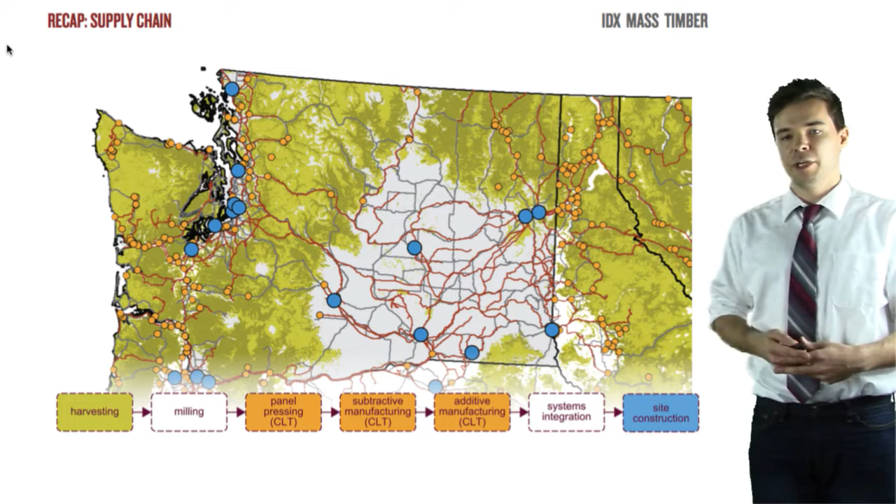We sifted through it and narrowed our focus on something more manageable. Here's an example of that: some more recent research and analysis that we did on four specific supply chains.

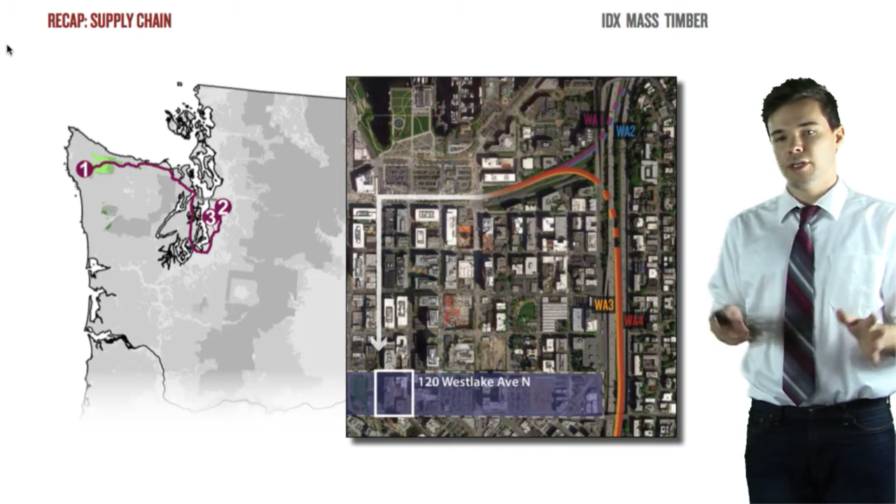On your left, you'll see one of the routes we chose. I believe it's from Forks, Washington, and that led to the number 3 on the map there, which is this zoomed in aerial photo of the South Lake Union area where we decided to have all these routes meet. Now this is what we're studying currently as the South Lake Union area, but the important thing to note is that because we were able to focus on just these few specific instances, we were able to get a lot more out of our research.

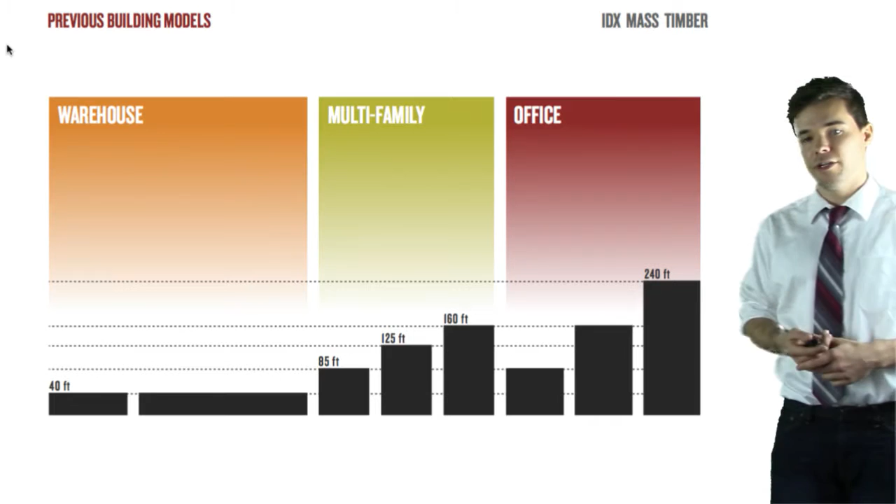And the same thing can be said for our building models. So these are pretty much all the models that we've examined so far in our research. We have some warehouses on the end there, multifamily in various sizes, and office in various heights. This is what we have now.

We narrowed it down and got rid of the warehouses and the 240-foot office for a number of reasons. One reason is that we can focus on just our residential and commercial buildings, and because these heights are very similar and the buildings are very similar, we can help each other's research while still having individual learning and creativity with our own model.

One other important thing to note is that all of these building models fall into what is sometimes called a mid-rise gap. The issue with this region right now is that traditional light frame timber can only be constructed so high before it becomes unsafe, up to about 85 feet, and then concrete and steel, which is far more expensive, is only really economically sound if you're building very tall towers, above 160 feet or even 240 feet. So this region here is something developers aren't really interested in until now, because we have mass timber. We can get these buildings up quick and for cheap, and that's a really big opportunity for us to look into.

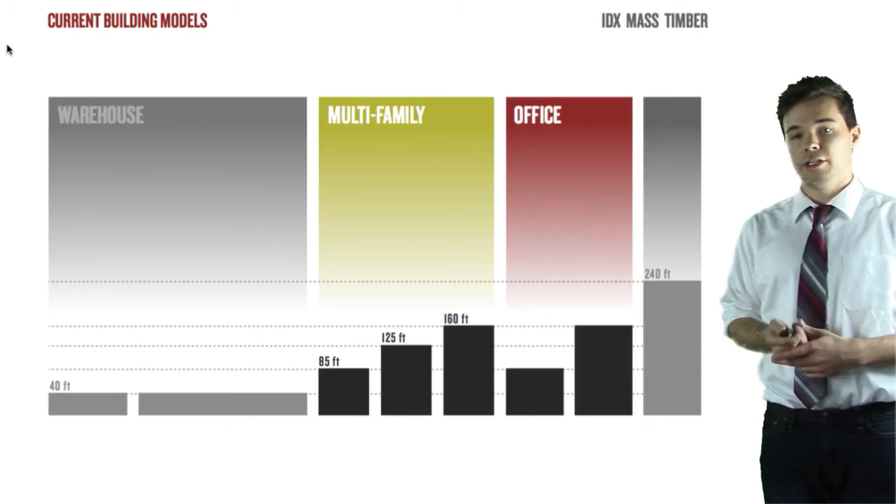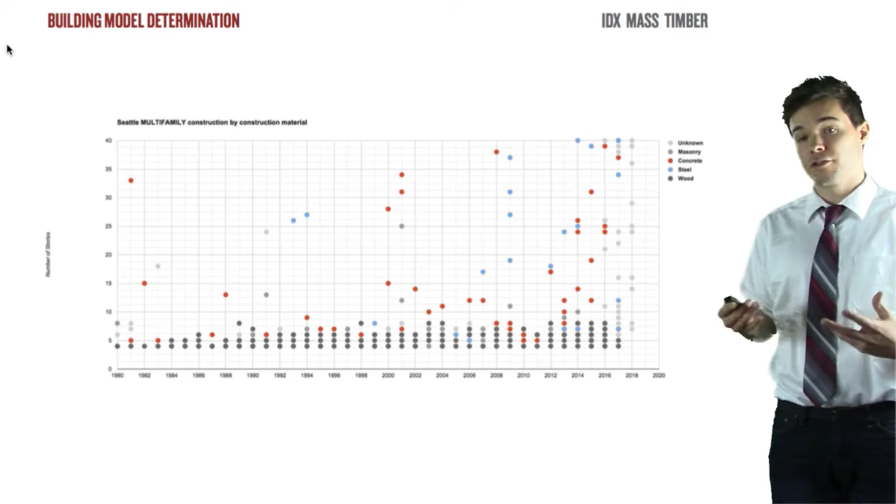By the way, this is the multifamily residential graph, and we also have an office graph, which is very similar, so it's a good example of that.

As for our locations, we started off with what we called the 4-state region: Washington, Montana, Idaho, and Oregon. Last year we narrowed it down to the Puget Sound area, since we had a lot of our current models in that area, as well as the warehouses falling into that category. We narrowed that down even further. Earlier this year, we looked at some very specific possibilities in Redmond and Bellevue, but we decided to stick with Seattle because we were more familiar with the code.

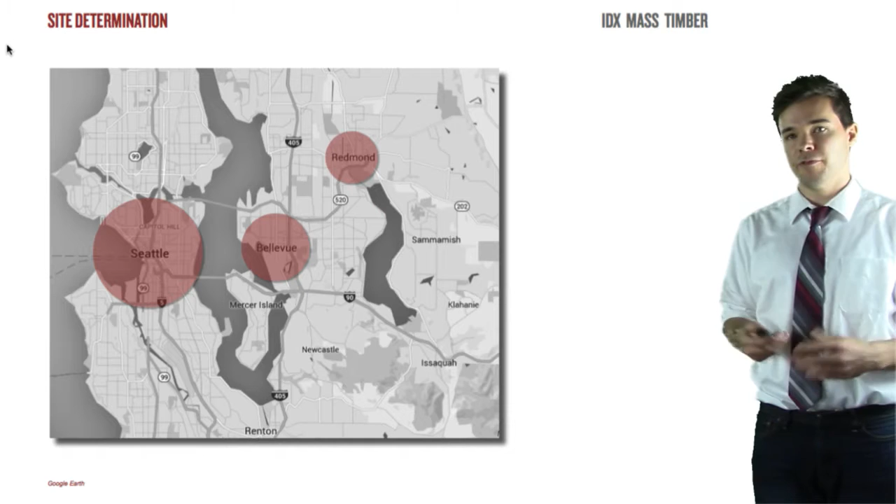Although it's important to note that the code is very similar to Redmond and Bellevue, and a lot of our models can be very easily adjusted to fit those codes as well, so that's a great benefit for our models. So we're going to be focusing on the South Lake Union region specifically, and this is an urban center much like Northgate or the University District or Capitol Hill, and these areas are booming, a lot of population growth and a lot of buildings going up as quick as possible. So these are very good places for us to be designing for.

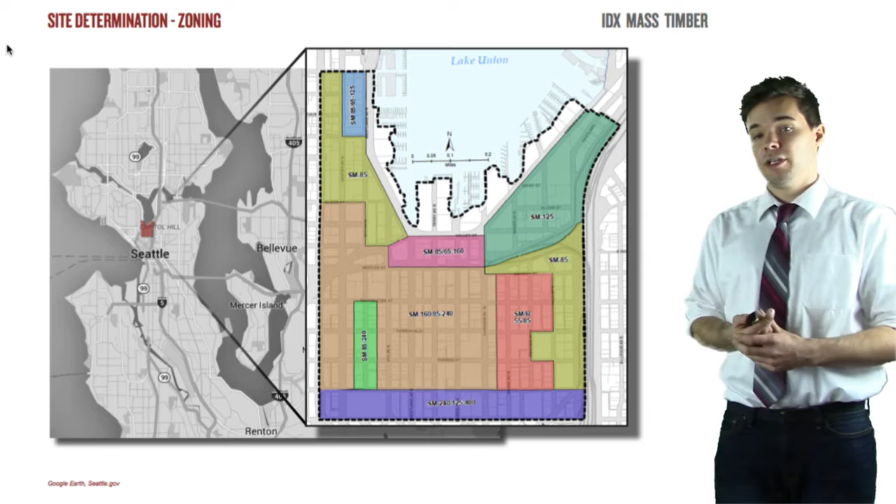And specifically these SM zones that you're seeing on this map are called Seattle Mixed Use. And in those regions we can actually build office or commercial and residential on the same lot. So that's extremely beneficial to us in that we can maybe even use multiple models of ours. And then here is a kind of zoomed in view of the same zones and where each of our building designs fall into those zones. So you can see that we clearly have a lot of options here, which is very exciting.

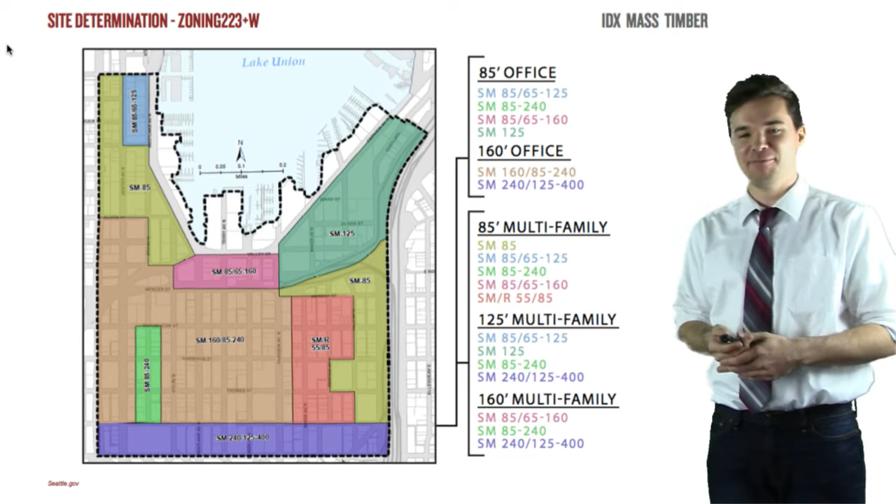However, building height and zoning are just two of many factors that we need to consider. So I'm going to go ahead and let Errol jump in here and explain some of our building assumptions, and he's going to show us some of the building materials that we could potentially use. So he's going to jump in here for that.

Hello. So the Seattle Building Code has several types of construction that are mentioned. Most of these are adapted from the International Building Code. And two pictured here off to the side are Type 1B and Type 3B construction. Type 1B is more typical in high-rise buildings. It's characterized by non-combustible or resistive materials, so stuff like concrete and steel traditionally. However, as we will show later, we are pushing for CLT to possibly be added to an acceptable material for that building type.

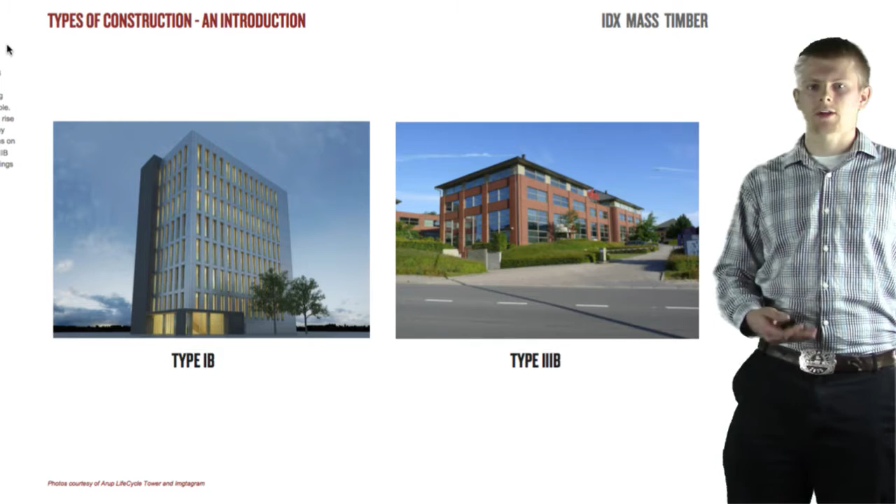And then also we have Type 3B construction. This is more common for low-rise buildings. It is characterized by a protected exterior from fire, and then on the interior you are allowed to have more exposed wood and combustible materials. Here we have Type 4 and Type 5A construction. Type 4 is heavy timber. So all the members in the structural system are oversized to allow for charring to occur, so that it burns in a more predictable manner, and it has been shown that this performs a lot better than lighter members in fire, as might be expected.

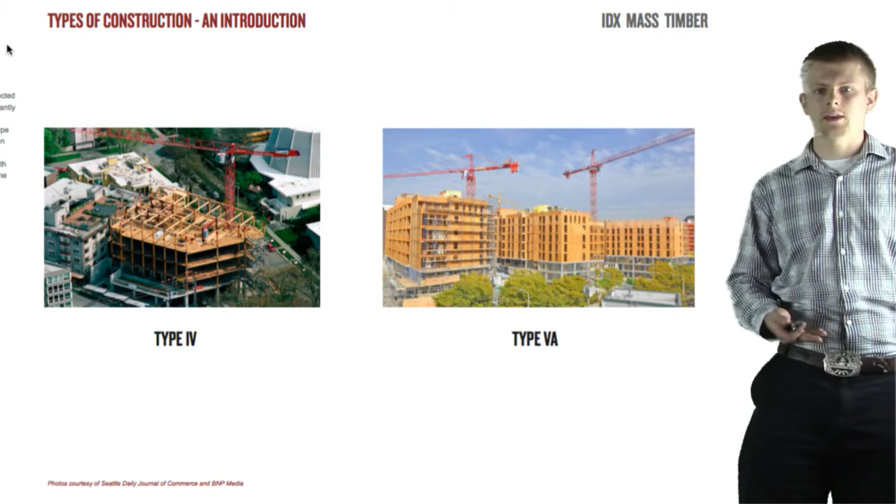Then we also have Type 5A. This is protected wood frame. Currently this is dominated by stick frame construction. However, CLT would certainly be an acceptable material for this, but to make CLT competitive, we're looking to perhaps get an added height allowed by the building code.

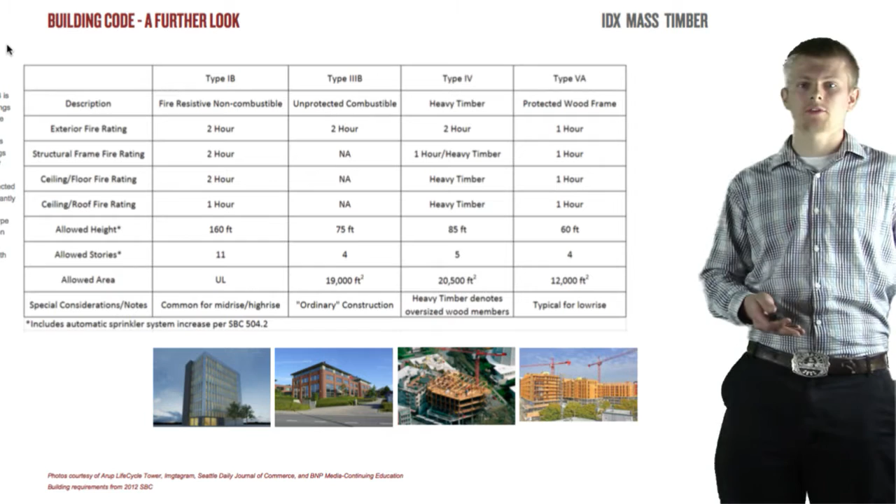So then to kind of bring it all together, here's a chart showing all the different restrictions. As you can notice, there are restrictions for the exterior resistance to fire on all of these different building types. Once again, I'd like to mention that there are more building types than just these. These are the ones we need you to be familiar with for our presentation, because we are building buildings with these building types in mind. So now I'll go into some more of the assumptions that we're making for our buildings and some variances that we need to make them able to be constructed to code.

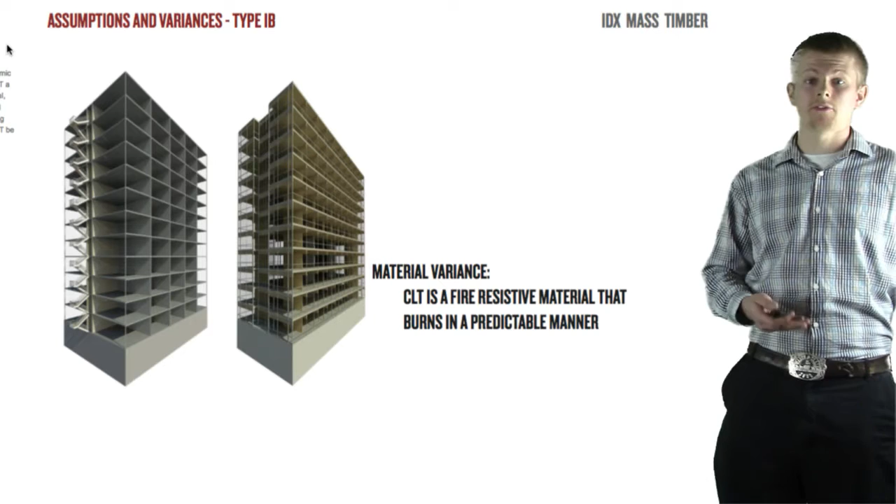So the first one is Type 1B. This is the tallest at 160 feet. You can see off to the side the office and multifamily buildings that we have for this. And here we're looking for a material variance. So currently CLT is not allowed for Type 1B construction. However, there is research being done that is showing that CLT is fire resistive, so it does not ignite readily just because it's so massive. It's kind of like the idea of a campfire. You need smaller stuff to ignite before you can get a large log to ignite. CLT is much the same way.

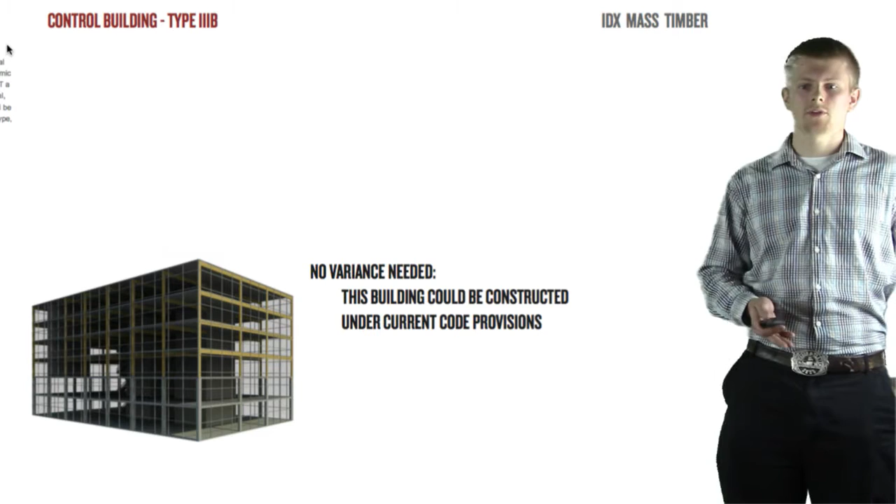And then we'll move on to Type 3B. So this is the one building that can currently be constructed to code as of right now. So this is a good one for us to compare the other buildings to. The reason this one can be constructed to code is because the inside is not restricted. However, the exterior needs to have a fire rating on it, which we are providing, as will be mentioned later, with our envelope. This is Type 4.

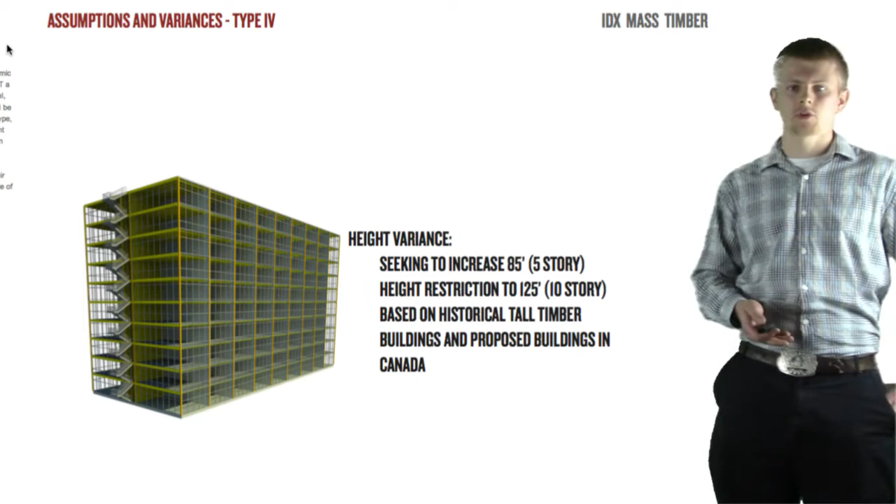This is the heavy timber, in case you didn't remember, so all the members need to be oversized. Now this governs also what CLT thicknesses we need, and all the different layers, columns, beams, all those things need to be oversized to meet the code.

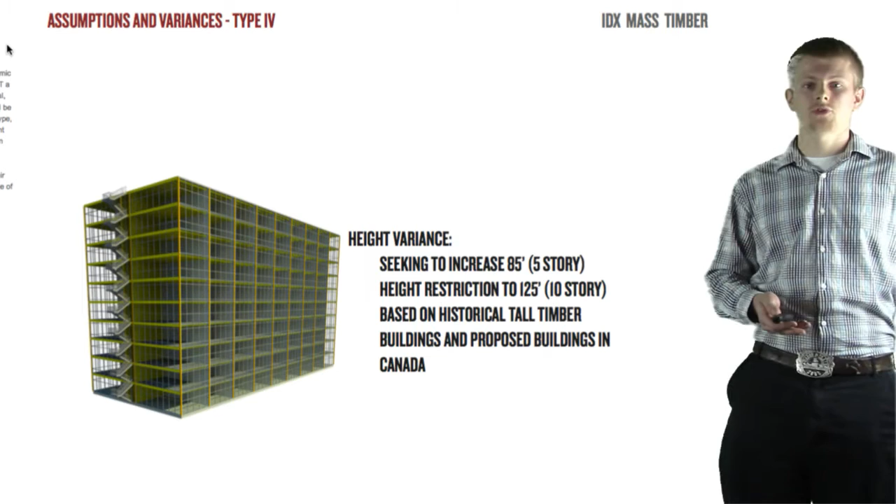However, the restriction that needs to be relaxed in order for this to work is the height restriction. So this building, as designed, is currently 125 feet and 10 stories, which traditionally is not that far off. However, current codes do not allow that, but based on precedent and current changes that are being looked at in the Canadian codes, we're thinking we can make a good argument for CLT buildings to go up higher than that current 85-foot restriction.

And then lastly, we have a Type 5A building. This building, we are trying to argue that a building that is designed to the current 60-foot limit, note this is for the tower only, with the podium, I don't want to get too confusing here, but with the podium it can actually go up higher. But currently the 60-foot restriction on the wood portion of the building, we're arguing if that would be relaxed, it would be structurally equivalent, because at 60 feet the wood members and components are not fully stressed and their structural capacity is not fully utilized.

So now I'd like to hand it off to Nicole, and she will talk a little bit about floor plans.

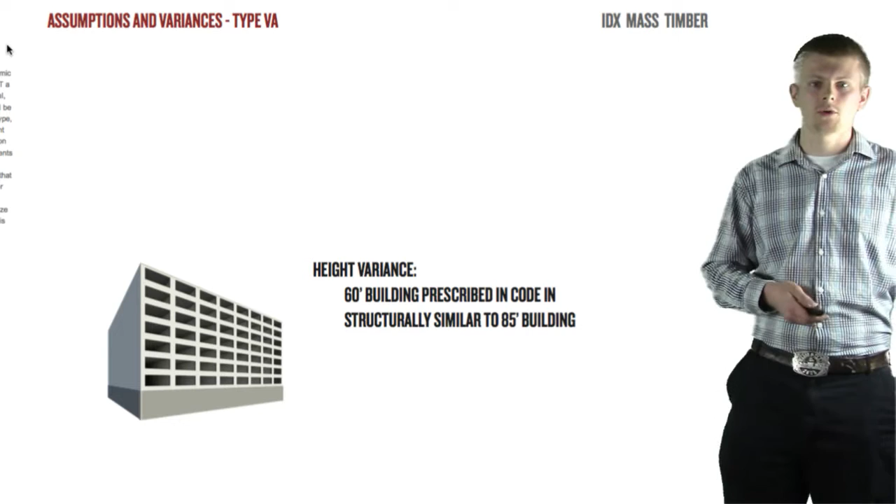So as Errol and Jesse have both discussed, the zoning, location, and building type of our buildings plays a role in how we plan to lay them out and/or design them. Behind me you can see the 5 buildings we will be exploring. Starting at the left, we have a Type 1B office, a Type 3B office, a Type 1B multifamily, a Type 4 multifamily, and a Type 5A multifamily building.

The biggest difference you can see between these buildings is the general size of their floor plans. This is the biggest variety we see, and a lot of this is limited by the type of the building and/or the zoning of the building. The other variable you see is the general layout of the buildings. The offices target more open space, while the multifamily buildings target specific markets for unit size and are attempting to maximize the amount of occupants they can have.

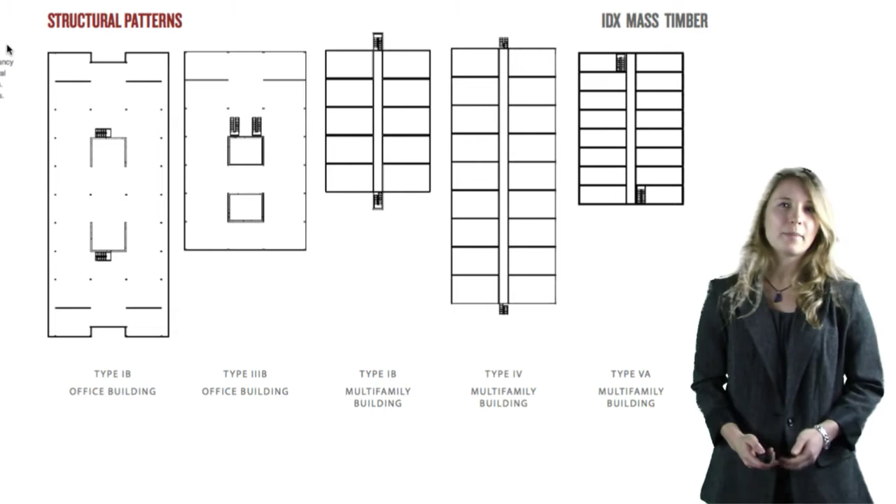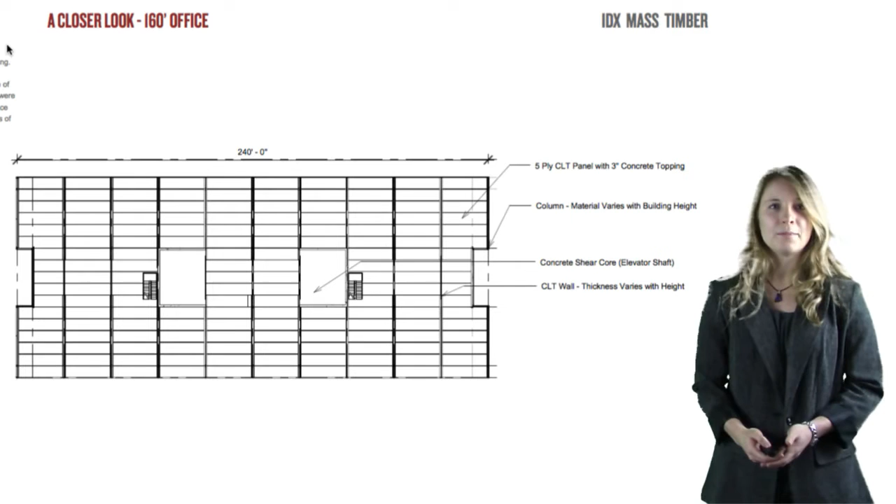Seen here are the 2 office buildings, and as you can see with their floor plans, they are very similar. They will use a shear core system to transmit lateral loading, and will use a gravity system of columns and beams. If we take a closer look at that larger building, we can see that it does feature these shear walls, the beam column system, and it also features these cutouts on the side that allow the building to fit into those area limitations. This building features a 24-foot span that is achieved through a 5-ply CLT panel, along with composite action between that and the concrete topping.

If we take a look at the smaller office, we again see a very similar floor plan. Again, it's going to use those shear cores and that beam column system to resist gravity load. And then as you can see here, we again have that 24-foot span, which also requires composite action between the concrete topping and the 5-ply CLT panel.

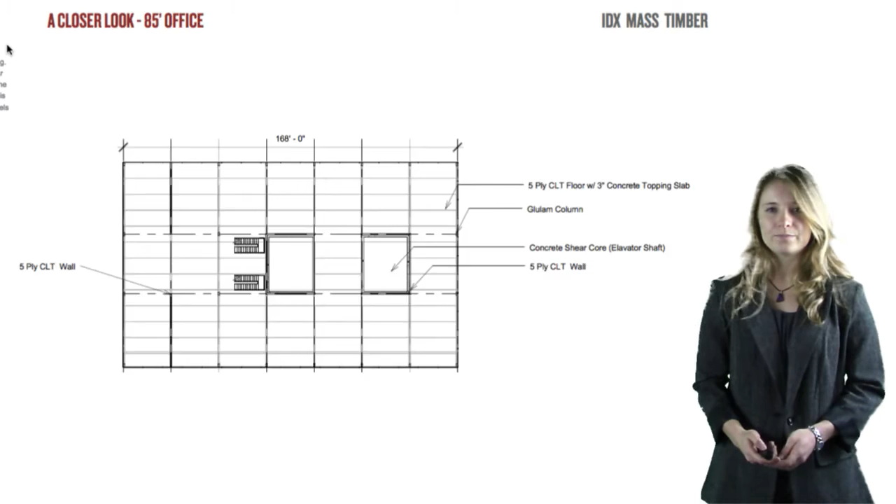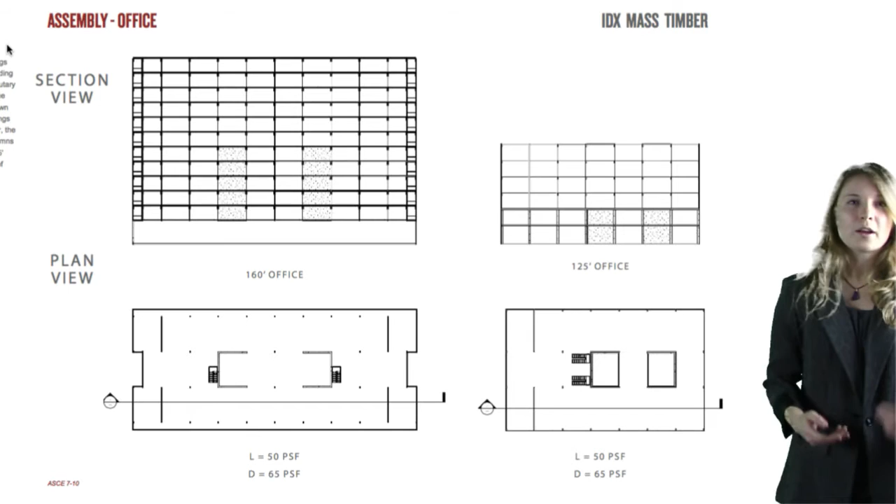If we look in here, we can see the difference between the sections of the building. So on the bottom, you will see the plan view for the 2 offices, and then above is their corresponding section. Again, the biggest thing you'll notice right away is just the size of these buildings. Again, that Type 1B building is going up higher than that Type 3B building. The biggest difference you'll notice is from the podium, the concrete columns that extend up into the CLT tower must extend further up in the 160-foot tall building. This is due to the compiled loading of the above floors down to that base.

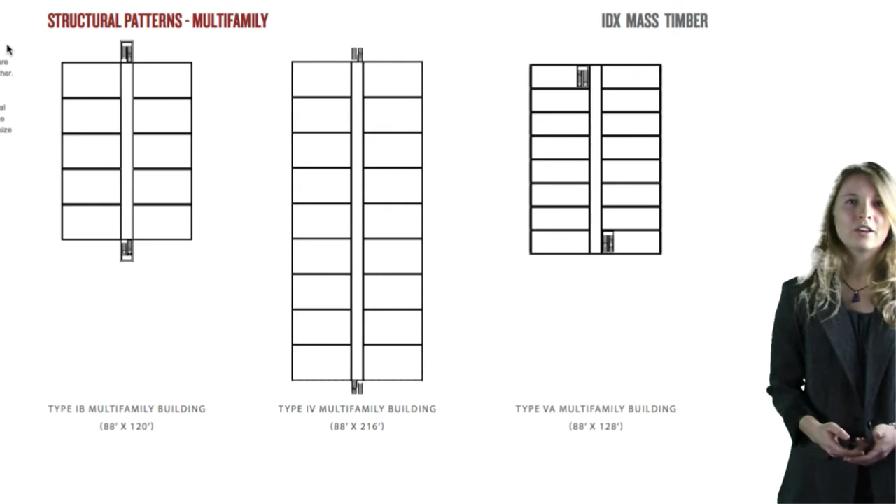If we move into the multifamily, we can see again that we have very similar layouts between these buildings. These buildings will use a distributed shear wall system to transmit lateral loading, and they'll be using a bearing wall system to transmit gravity loading. As you can see, the layout's very similar. Your biggest difference is going to be in size. However, another difference is going to be in just unit size. The Type 4 building and the Type 1B building target markets of 1 to 2 bedroom apartments, whereas the 5A building is going to target a studio to 1 bedroom apartment.

So if we take a look at that taller multifamily building, we again see that 24-foot span, and it, like the office, is achieved through a 5-ply CLT panel and a composite action between that and the concrete topping. This building also features a double 5-ply CLT wall for its interior wall system. This would consist of a 5-ply wall, some sort of insulation or air, and then another 5-ply wall sandwiched around that insulation. There are many ways to achieve the routing for mechanical, plumbing, and electrical. However, we've decided to go forward by routing our electrical through these walls in order to access all the units.

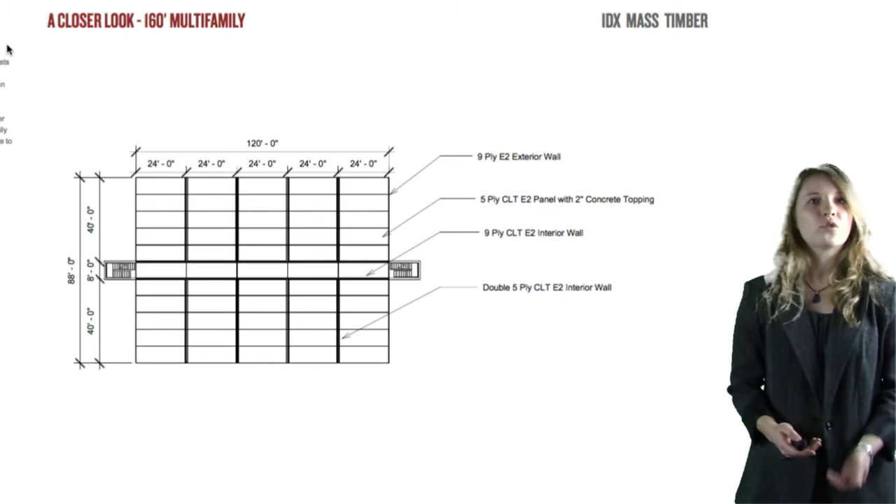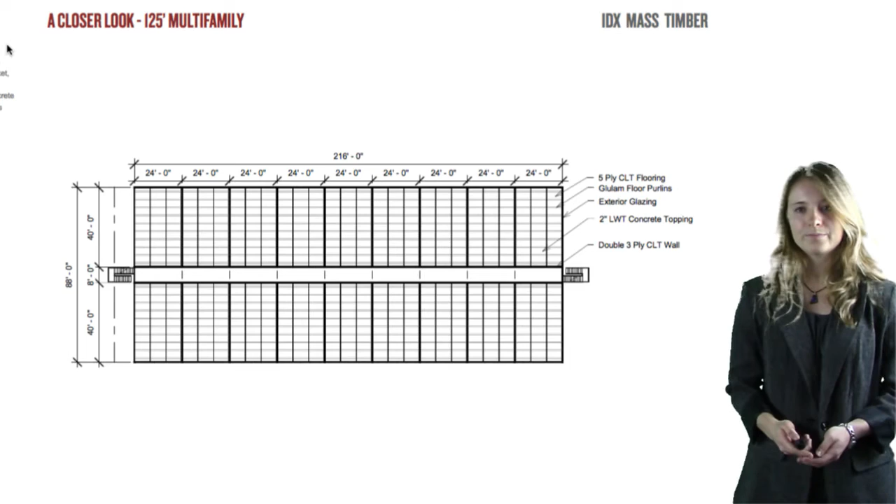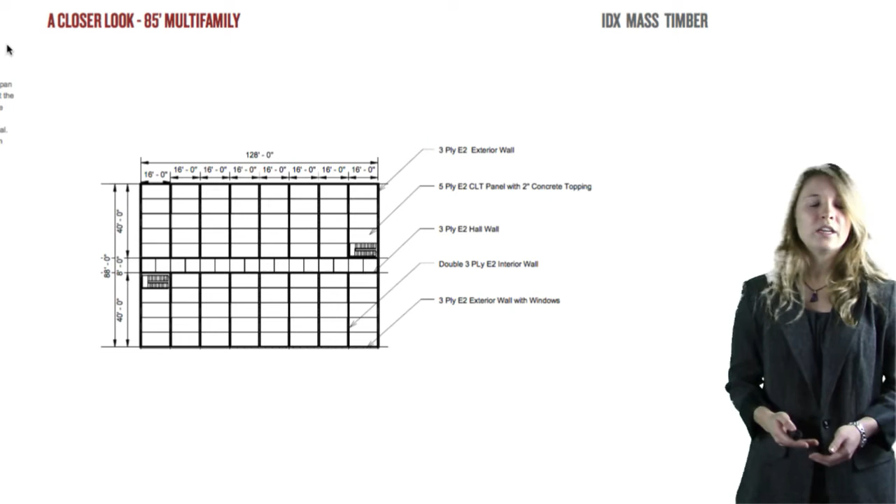Finally, we have that smaller multifamily building. This building features a unique 16-foot span, and it also uses a 5-ply CLT panel to span this distance. There is concrete topping, but again, composite action is not needed to reach that 16-foot span. This building uses a double 3-ply CLT wall, again for the interior. However, the exterior walls and hallway walls feature just a single 3-ply panel and extra insulation to either route mechanical, plumbing, or protect the interior from elements. There will also likely be an interior partition wall that will be put in each unit to allow plumbing to each of the units.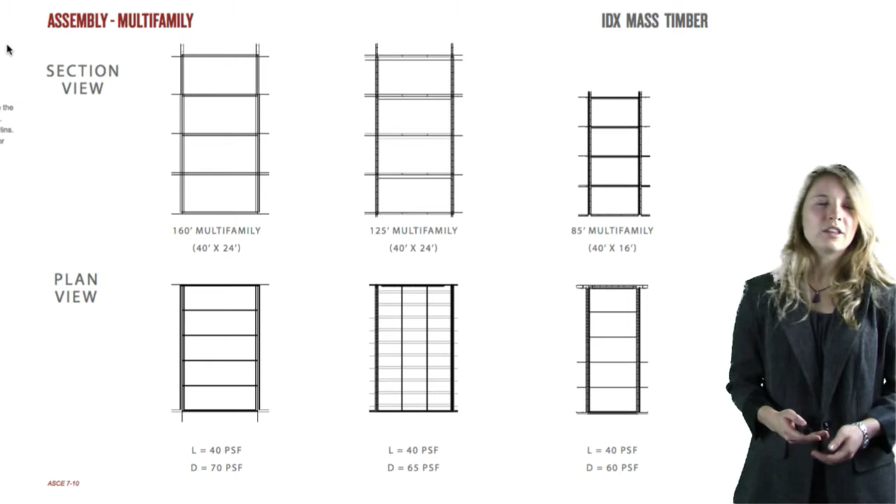And now I'd like to hand it over to Rob, who will go into more detail on the connections and details of these buildings. All right, thank you, Nikki. So up until this point, we've really been focusing on the bigger scheme of things. We've been looking at floor plans, we've been looking at elevations, what type of material we're going to be using, all really important aspects to look at in our building design. But now I want to look at a detailed look of the connections that we're going to be using. I've heard it said that a building's made of connections with a lot of material just in between those connections. And it's really important for our building because it's really what pieces our building together.

To set it up, I want to first convey to you guys that these are just preliminary designs. These haven't been engineered. These haven't been sized appropriately. So the reason why we do this is because we first need to see what the layout of these connections are going to be according to IBC. There's different codes that we have to adhere to according to the different building types. And so because of that, we want to make sure that we have our layout correct, and we have a visual analysis of that, and then from there we can go in and we can actually start sizing out what size steel we need, what size bolts we have. So this is all preliminary. This is a visual effect that we need to go through first in order to move forward in designing the size of steel and the size of bolts.

Also, before I get into this, I want to convey that for each building type, what we've done is we've used balloon type construction. And so balloon type construction is when the diaphragm comes and it ties directly in and hangs off of the wall or column.

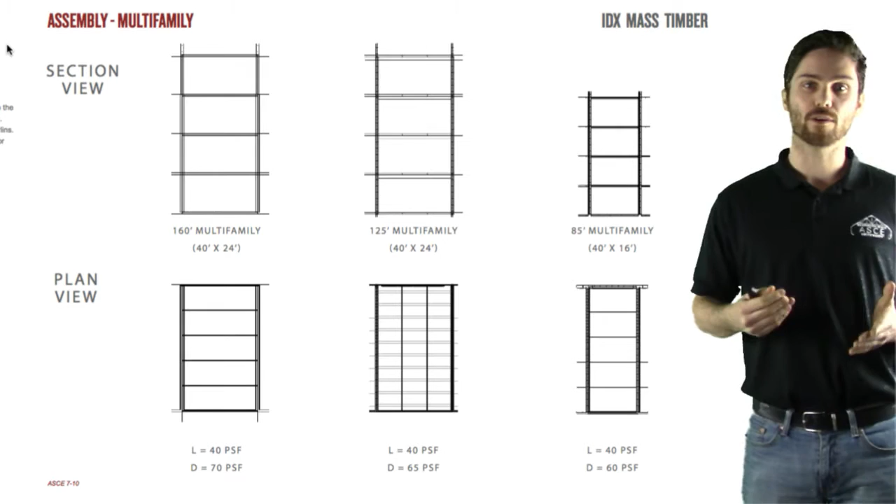This is opposed to platform construction, where the diaphragm would sit on top of the wall or column, and then the next wall or column would be placed on top of that. We're not doing that, primarily because we want to avoid issues of shrinking or swelling. Even crushing for the larger buildings could occur in the diaphragms. So to avoid all that, we're doing balloon construction. You'll see it in the slides to follow.

Starting with our Type 5 multifamily residential unit, we have a bearing wall system. The walls connect together with steel plates, connected by bolts. As Nicole said, there's a Microwool sandwiched inside the 2 CLT panels. For this one, we have 2 3-ply CLT panels, and inside that is the micro wool. Within the micro wool, you can run conduit, electrical, whatever you need—you have that space there. We're using either 3-ply or 5-ply CLT on either side to sandwich those together.

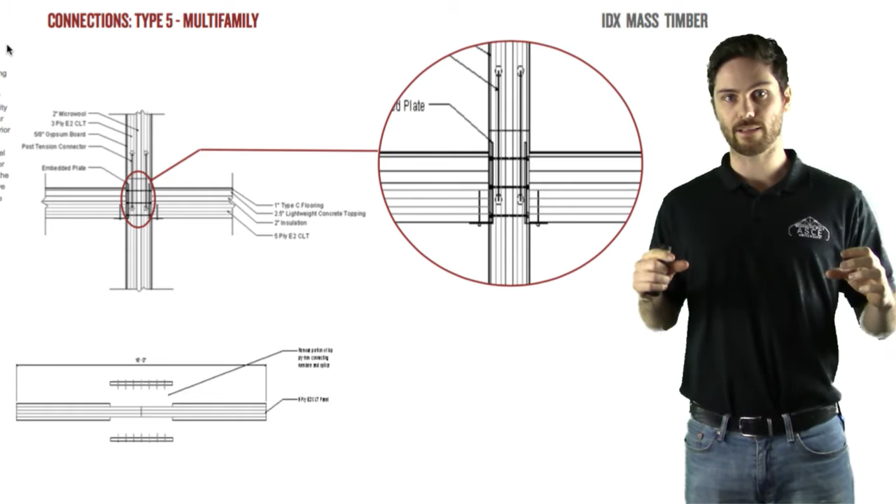The CLT diaphragm hangs directly on a hanger—an L-shaped bracket made of steel, attached to the steel connecting the two walls together. It just hangs directly on that. We have concrete on top, as well as insulation, and gypsum board on either side for fire protection. To connect these diaphragms together, we notch a little out of the CLT, place steel plates in there, and bolt it together, and we should be good to go.

Next up is the Type 3B office. What's important to note is that this is not a CLT wall, but a glulam column. The glulam columns are stacked on top of each other. We did think about doing just 60-foot columns, but the problem is constructability. We found it'd be easier to construct in segments, bearing on top of each other, so we decided to go with that instead.

You see this H bracket, as I like to call it, made of steel, where they both slide into each other, and bolts connect them together. From that bracket, there's a kerf plate, and on this kerf plate is how a glulam beam comes and attaches right into that column. We notch out the glulam beam, slide it right into the kerf plate, pop a bolt in there, and we're good to go. That goes from one column, and the glulam beam then goes to the next column.

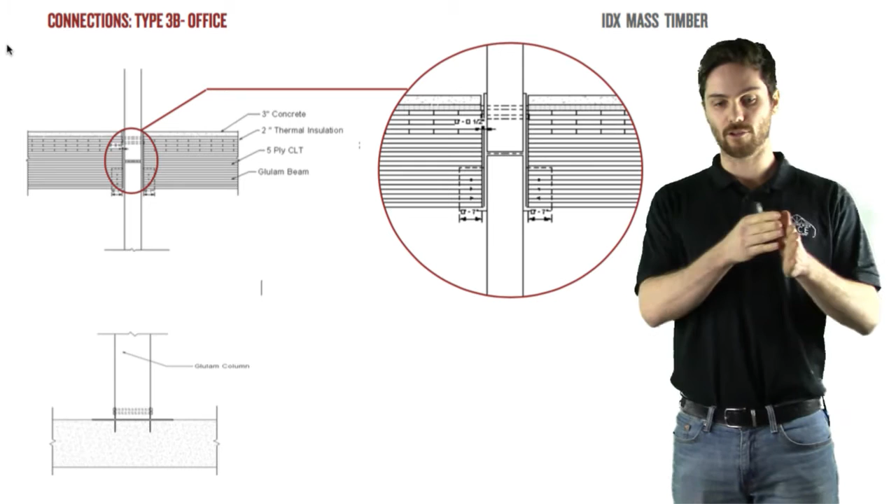Orthogonal, going into the page, are our CLT panels sitting on top of that, bolted in, spanning 24 feet with concrete on top, which we need for the composite action. Furthermore, to connect the columns down into the foundation, we're going to use some sort of anchor bolt system to make sure we have a sturdy connection there.

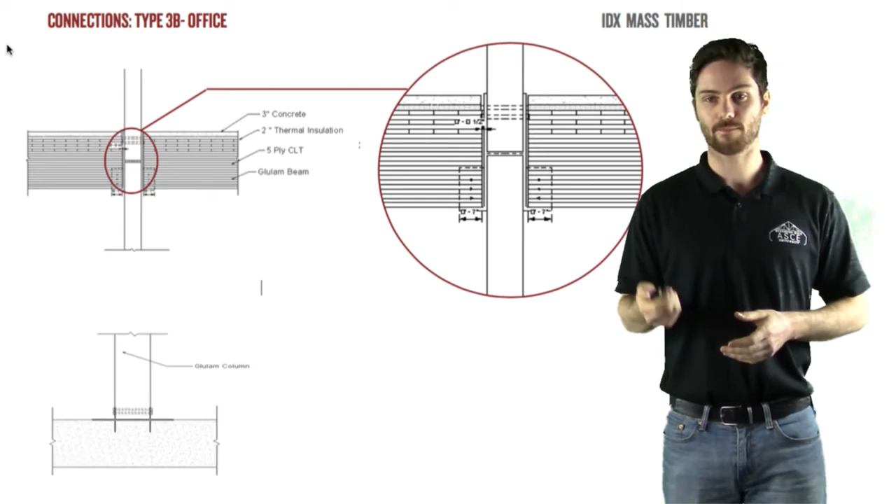Next up is the Type 4 multifamily residence. You'll notice some similarities to the office we just looked at. However, this building will have a CLT wall instead of a glulam column. That's the difference here—otherwise the same sort of ordeal.

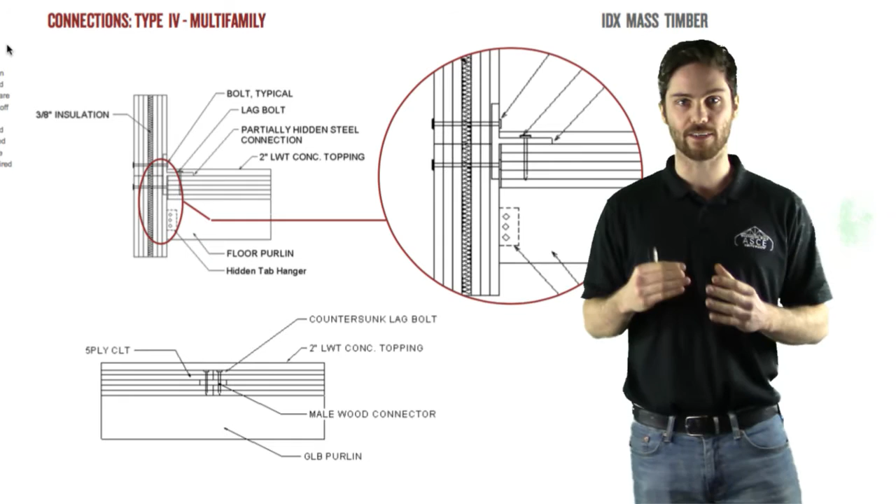There's going to be a metal sheet, a metal bracket that connects the two walls together. From that, a glulam beam comes and attaches into the wall itself via a kerf plate—same exact thing: take a notch out, put it in, then a bolt, and you're good to go. That spans between each CLT wall. Then, same as before, the CLT sits on top of the glulam beam and spans the 24 feet. Furthermore, to connect those diaphragms, it's a very similar idea of bringing them and splicing them together, which we've already shown.

Now we're going to be getting into the type 1B construction. And the big goal with this, and the biggest challenge, was overcoming the fire issue.

What I mean by that is all the connections had to be completely covered. There couldn't be any connection without some sort of gypsum board or something covering over it where no steel is actually showing. So that was the biggest challenge for this.

As you can see for the type 1B multifamily, you have two bearing CLT walls connected and spliced together with two steel plates, bolted together. What I have here is a hidden bracket coming off of the wall, submerged into the diaphragm itself, and those will come and meet up together and be bolted together.

Once you put gypsum board underneath that, it should be completely covered. Furthermore, if there's any bit of gap in between the wall and the diaphragm, there's actually a foam that meets code to completely cover that if there happens to be any of that showing. So that's kind of a backup plan in case we need to utilize that.

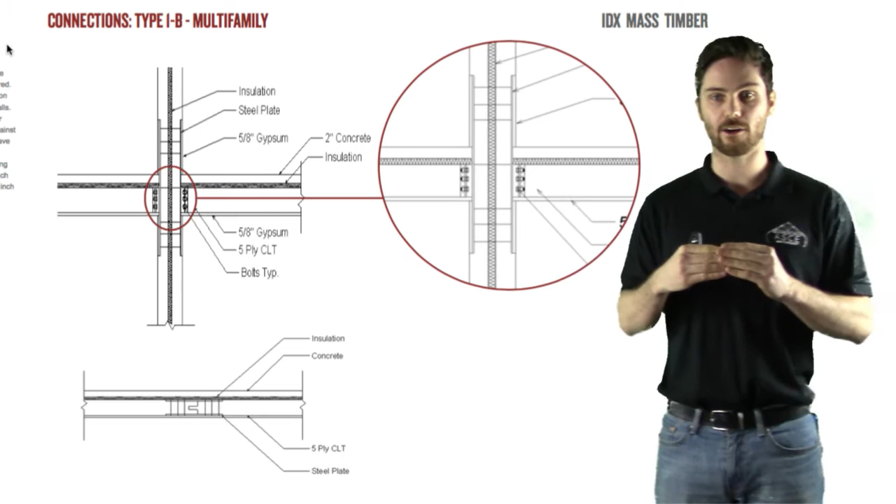Same thing for connecting those diaphragms together is a splice plate, but this time we're using a male-female connection, and that's going to slide right in together with steel plates on either side, bolt that together, and good to go.

And last here we have the type 1B office. What you're going to notice here, that's the main difference, is the concrete column. This goes up from the first story up until maybe the fifth story or so. We haven't completely figured out how high we need to have these concrete columns go.

From these concrete columns, going into the page, we're going to have glulam beams that are attached to the column itself. Then from that, that's going to be used as a ledger where the CLT panels, or the CLT diaphragms, are going to come and rest right on top of that.

Again, making sure all these connections are covered is a huge important factor for this. With what we have here, everything seems to be good, and there will be further details as we go into the design of exactly how these are going to work. Lastly, the diaphragm is going to be the same thing, a male-female piece connected together.

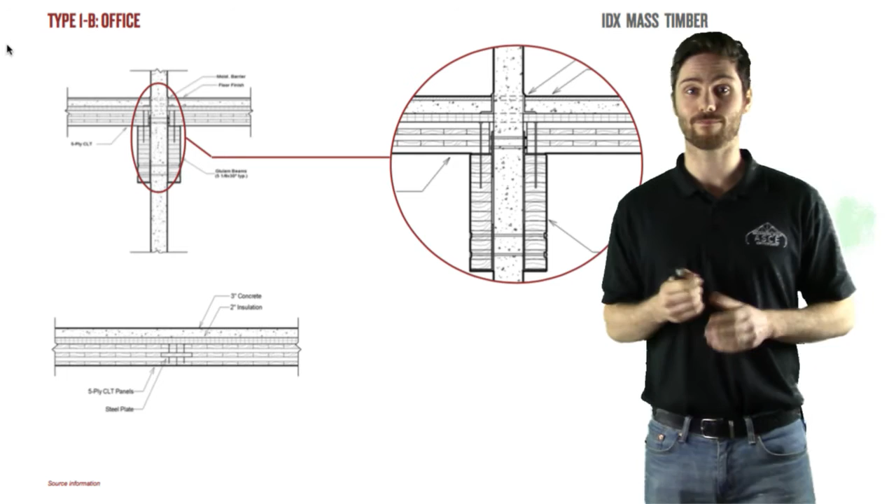One of the other things we've been researching this semester is building envelopes. Really, a building envelope's job is to keep the exterior environment out from the interior of the building, whether that be snow, rain, wind, water, heat, extreme colds, or extreme temperatures.

The systems we've come up with for our 5 baseline models is we want to use a curtain wall system for 4 of our models and a window wall system for 1 of our models, and that one model is the 85-foot multifamily structure. The big difference between a curtain wall system and a window wall system is that curtain wall is one continuous sheet of glass, and window walls are broken up between floor levels. They attach to the bottom and top of each floor, while curtain walls attach to the side of the floor.

Some of the negatives, drawbacks, and positives of each of these: curtain walls are about 4 times more expensive than window walls, and they're usually on high-end structures, but they are extremely good at keeping out moisture because there are no gaps in the structure. Whereas window walls have a tendency to leak if they're not installed right, because there are so many more gaps within the structure since they have to connect to the bottom and top of every floor.

But window walls are about 4 times cheaper than curtain walls, and they also offer better noise insulation between the structure, because curtain walls are one continuous wall and have a tendency to let noise travel between floors. So you might be able to hear something on the 3rd floor if you're on the 2nd floor.

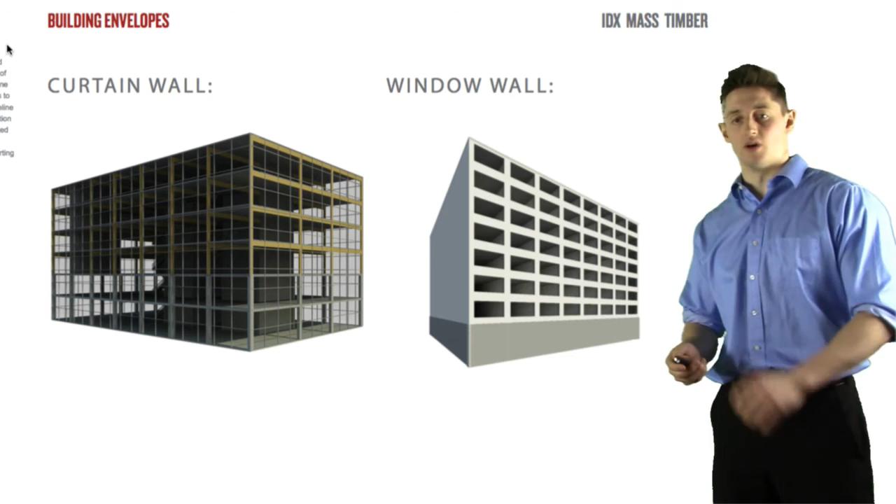And that's kind of some of the main drawbacks and differences between window walls and curtain wall systems. Now getting into the details of how we might connect these to our structure.

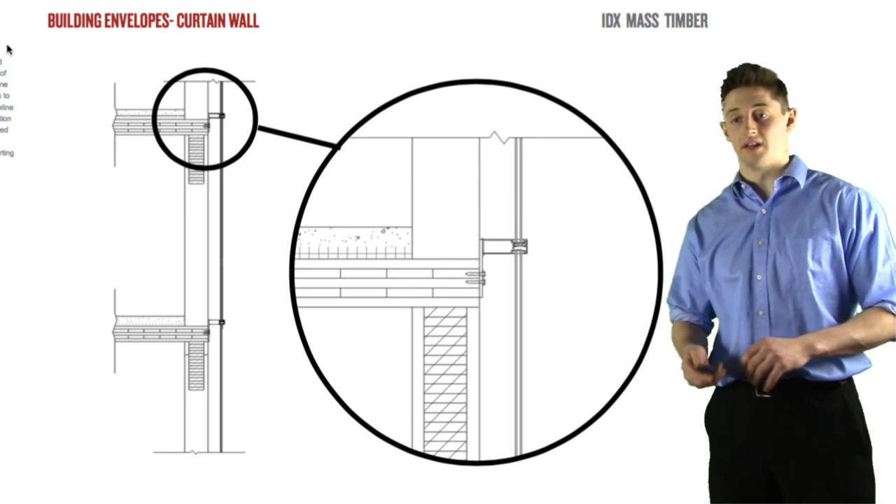Here we have the curtain wall setup, and you can see that our structure connects to the outside of the floor. We wanted to make sure we were connecting into the diaphragm of our structure. We had a steel plate that connects to the mullion, and then the mullion connects to the window. So if wind was to hit this structure, half of the wind load from the bottom half and half from the top half would then be transferred directly into the floor diaphragm.

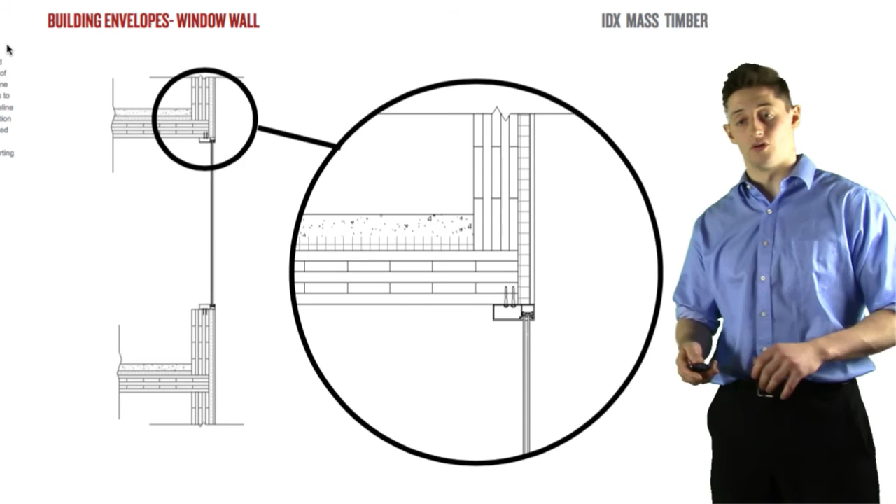Moving forward to our next steps, we wanted to start taking a look at what kind of environmental impact would happen based on the different building envelopes we've chosen. With our 85-foot multifamily, the one that's different with the window wall system, there's going to be a lot of walls on the structure, so we're going to take a look at what kind of R values we can get with the insulation we're going to use with those walls.

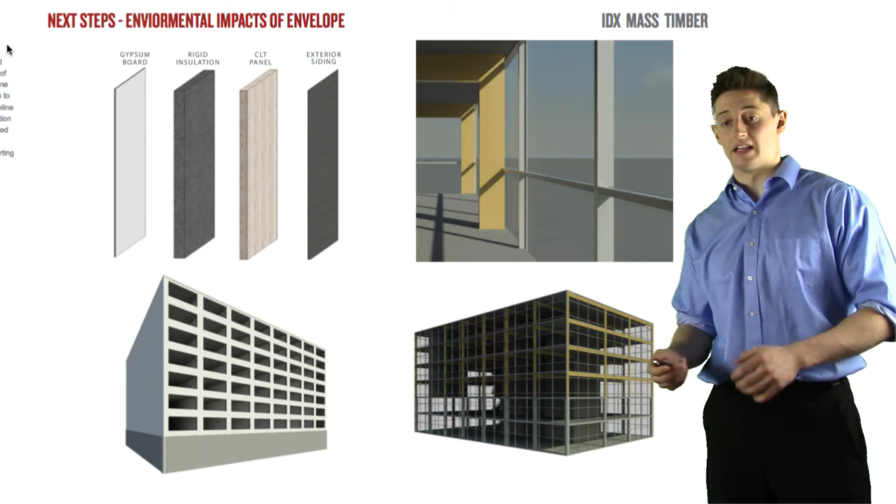We also want to take a look at our window wall or curtain wall systems that the other 4 building models are going to have, and what kind of glass we're going to use, what kind of R values we can get out of the glass, whether the glass is going to be tinted or not, and how that's going to affect the structure.

Another aspect we're looking at as we move forward is the seismic analysis of our structures. Right now we're looking at 3 different main lateral force resisting systems: lateral bracing, CLT walls as shear walls, and concrete shear cores. Based on what lateral force resisting system we use, it's going to give the building a different ductility, which will then give the building different design loads for each floor in seismic.

We're going to take a look at how each one of these different lateral force resisting systems affects our building, and then we're going to make a decision as to how we want each one of these buildings to perform based on our choice of which system we're going to use for the building.

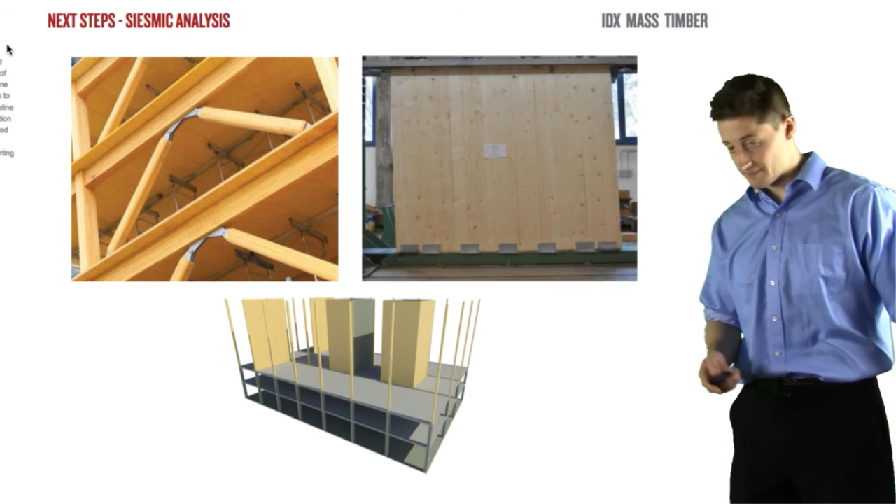Our end result here is we want to create structural drawings for each one of our 5 baseline buildings. We've seen some of the details, some of the floor plans. We're already on our way, but we want to wrap it up so we have professional structural drawings for each one of our 5 building types. That's kind of our end goal of the semester here.